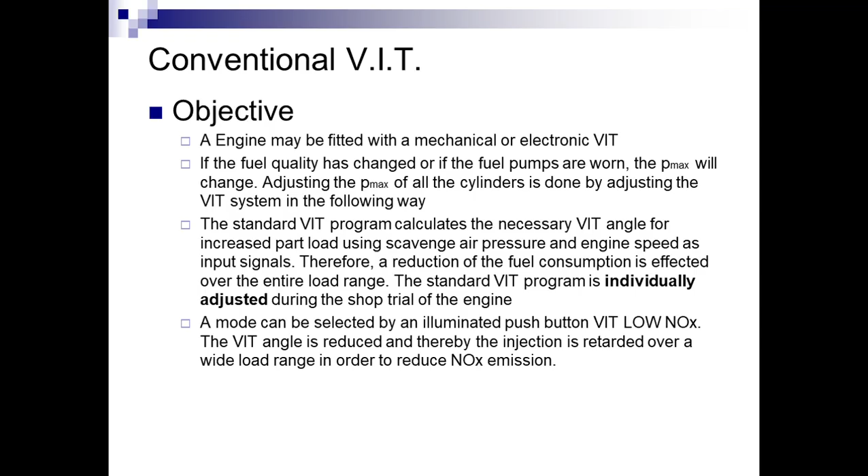Now, adjustment of mechanical VIT. The pilot valve has been pre-adjusted to 0.5 to 5.5 bar control air pressure, corresponding to 0.5 to 8 mm pressing in of the pin C. You can see here, this is the pin C, by which we are adjusting it.

To check a pilot valve already mounted on the engine, remove the inlet and outlet pipe connections at A and P, and connect a pressure gauge at A. After removing it, this is not the actual system, this is the pressure gauge we have adjusted. Connect a pipe with working air pressure of 7 bar at P on the pilot valve, and connect the pressure gauge at A.

Check that the pressure on the pressure gauge and the pressing in of pin C are in accordance with the curve. The adjustment of C given earlier has to be in sync with this graph. Correspondingly, however much you adjust, that is how much pressure will show on your pressure gauge.

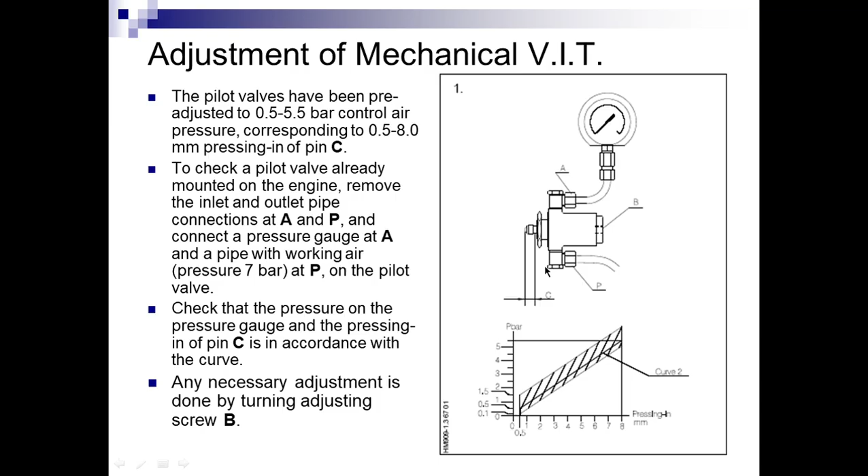Now, fine adjustment of the pmax pressure at the breakpoint for all cylinders is to be carried out by axial displacement of the bracket with the pilot valve.

Release the screw and nut which secure the bracket with the pilot valve to the larger bracket through the slotted holes. Increase the pmax pressure by moving the pilot valve towards the lever. Decrease the pmax pressure by moving the pilot valve away from the lever. This is how it is done.

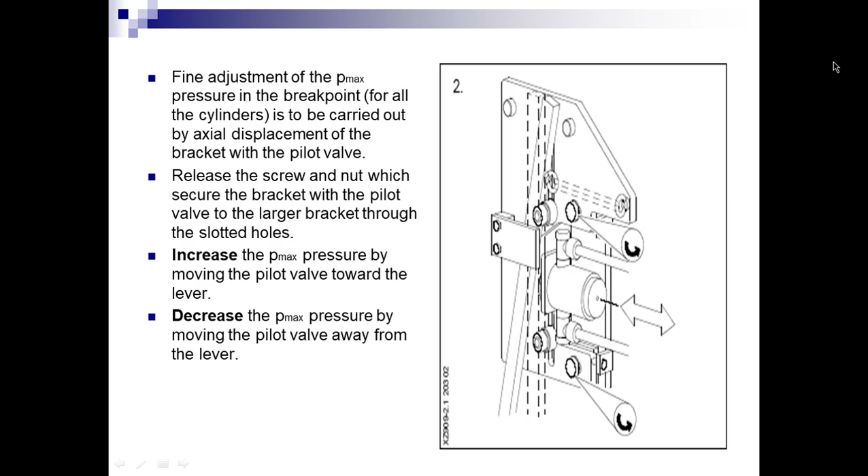So I hope it is clear for you. Now when we discussed what is known as your mechanical VIT.

Now when we speak about electronic VIT, the adjustment should be based on a set of indicator diagrams taken when the engine is running just above the breakpoint. On the panel in the engine room control room, change the P offset value in accordance with the required increase or decrease in the Pmax pressure.

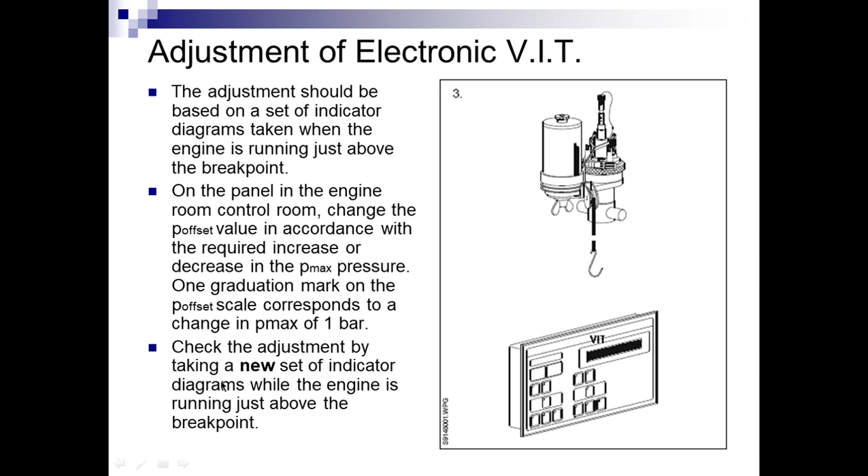One graduation mark on the P offset scale corresponds to a change in Pmax of 1 bar. Check the adjustment by taking a new set of indicator diagrams while the engine is running just above the breakpoint. Now we speak about FQS, having already seen mechanical VIT.

Now we have seen what is known as your electronic VIT. Now we are going to see this FQS. This is also a very important aspect, and it is fuel quality setting. So how are we going to adjust the fuel quality?

The objective is that the engine is equipped with a VIT plus FQS system, that is variable injection timing plus fuel quality setting, which permits an alteration of injection timing during operation.

Now the VIT plus FQS system produces a maximum firing pressure over a wide power range close to the value of the contracted maximum continuous rating, and thereby reduces the fuel consumption.

It is also possible to tune the VIT plus FQS system to follow NOx emission limits. Now the control of the VIT plus FQS is integrated in the engine remote control.

The manual FQS setting serves to take into account various fuel qualities. Fuels having a low ignition quality result in lower firing pressure for the same start of injection.

That is, for compensation, the FQS angle has to be increased. So if we have a fuel which is of lower ignition quality, resulting in lower firing pressure, we can adjust the FQS angle by increasing it, that is the fuel quality setting.

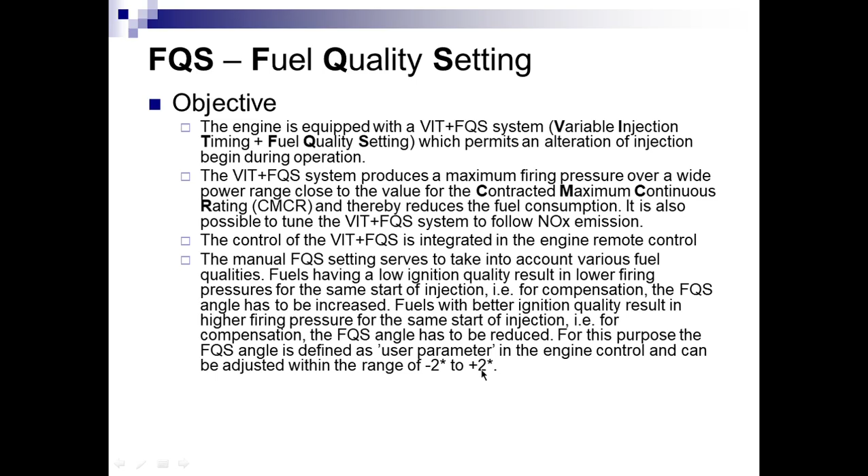Injection pump regulating linkage with electronic VIT and FQS. Now see, this is the linkage that we are looking at. Independent from the utilized governor type, the regulating linkage transmits the movement of the governor output lever, which is 1. So we have the governor and governor output lever, denoted as 1.

Via the intermediate regulating shaft, that is known as 4, to the eccentric shaft 15. So there is an eccentric shaft which is 15, denoted over here, and then for the spill valve of the injection pump.

So for the spill valve of the injection pump, the spill valve determines the end of injection and therefore the quantity of injected fuel. This spill valve determines your end of injection, and therefore the quantity of fuel that is being injected.

Now the adjustable rod 2. This is the adjustable rod which we can adjust to ensure a rigid connection between the actuator and the regulating linkage.

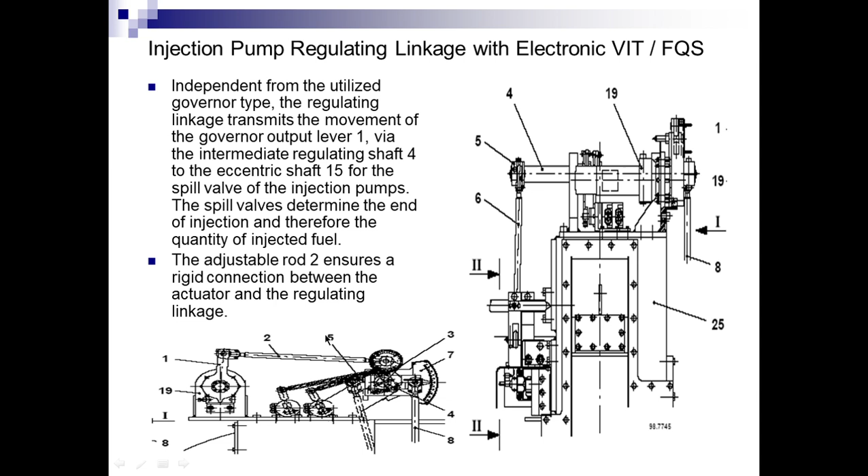In its normal operating mode, the VIT plus FQS system produces earlier injection in the partial power range and therefore raises the maximum firing pressure. With the manual adjustment FQS, the influence of fuel quality is compensated.

With the aid of the pneumatic cylinder in the positioning unit 17 and via the connecting strap 18 - you can see here it is 18, and this portion is 17 - the position of the suction valve and spill valve regulating lever 9, the spill valve regulating lever that is 9 which we spoke about in the previous slide, and 14, are simultaneously altered.

They are simultaneously altered, all at the same time, or maybe one after the other.

The moving out of the pneumatic cylinder gives higher VIT angle. So when this pneumatic cylinder is moving out, it gives a higher VIT angle, that is an earlier injection, and therefore a higher maximum firing pressure.

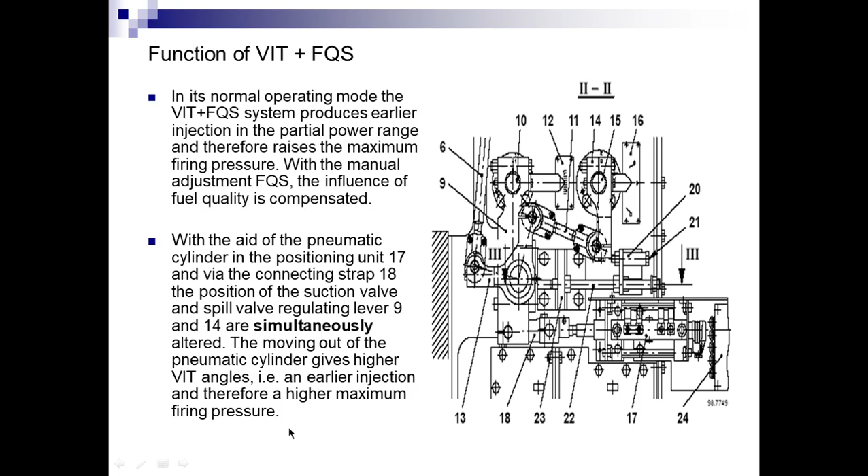So in case the fuel quality is lower, this cam is going to move out. This pneumatic cylinder is going to move out, so this will give higher maximum firing pressure because we will have earlier injection.

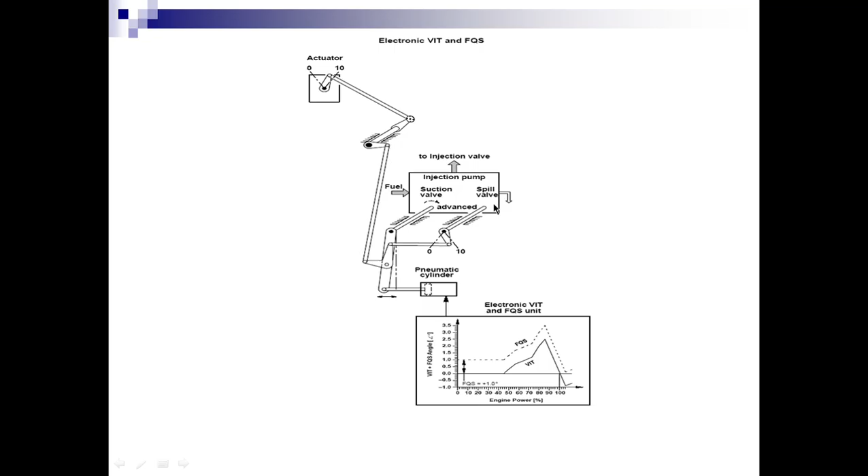This is the actuator we are speaking about, number 10, and through these different linkages it is connected to this pneumatic cylinder. Based on this, if it is moving towards the spill valve side, that is your advance, and if it is moving in the opposite direction, which is not shown here, then it will be in retard mode.

When we speak about super VIT, now we have already discussed all those things. Now we are going to discuss super VIT. The super VIT system is developed to fulfill the requirement of maintaining the MCR Pmax under part load conditions.

When we are running all the engines right now, except these new engines, we achieve the Pmax condition at MCR, but what is not achieved in all parameters of the engine is under partial load condition, in order to save fuel. We want to save fuel, because if the engine is running at low load, fuel consumption is much more as compared to the engine running at higher load.

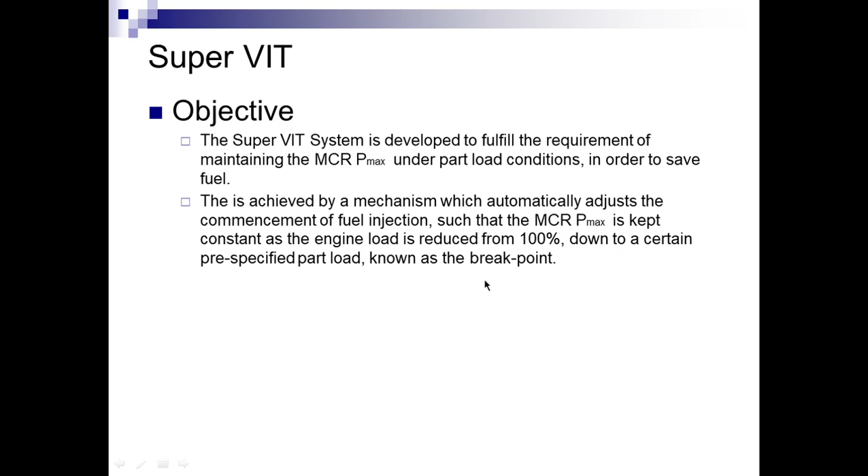This is achieved by a mechanism which automatically adjusts the commencement of fuel injection such that the MCR Pmax is kept constant as the engine load is reduced from 100% down to a certain pre-specified part load known as the breakpoint.

Now how is it working? In the super VIT configuration employed on the larger L/K/S-MC engine, the fuel pump plunger is not profiled, that is, it has no extra oblique cut, but instead the start of fuel injection timing is freely determined by altering the vertical position of the pump barrel, whereby in the system the breakpoint is fully adjustable.

So it is unlike your normal VIT system. The pump barrel is moved up and down relative to the plunger by means of a rack and pinion in combination with a double thread. The VIT rack setting itself is controlled by the regulating shaft position, according to the engine load.

When running at the breakpoint, the pump cylinder will be at a low position, giving early injection, and the specified design Pmax MCR and Pmax V for the engine in question, whereas in case of the conventional VIT system the breakpoint is fixed.

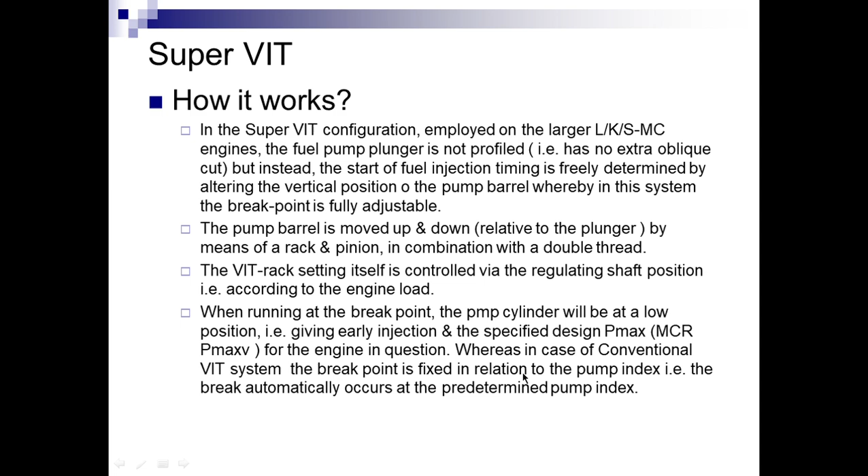So this is the difference in when we speak about the breakpoint, fixed in relation to the pump index, that is the break automatically occurs at the predetermined pump index. Now you see,

This is the pump barrel, that is the plunger, and we have double threaded injection timing regulating VIT. This mechanism is there, and position servo individual adjustment at each fuel pump. So at each fuel pump we have this individual adjustment.

Now this control air is going for operation. Now we have fuel quantity regulation index. Position sensor unit for collective adjustment is there. VIT rack position servos are controlled by means of an air signal from the common position sensor valve, which is placed on the emergency stand. So this is the change that has occurred of emergency stand.

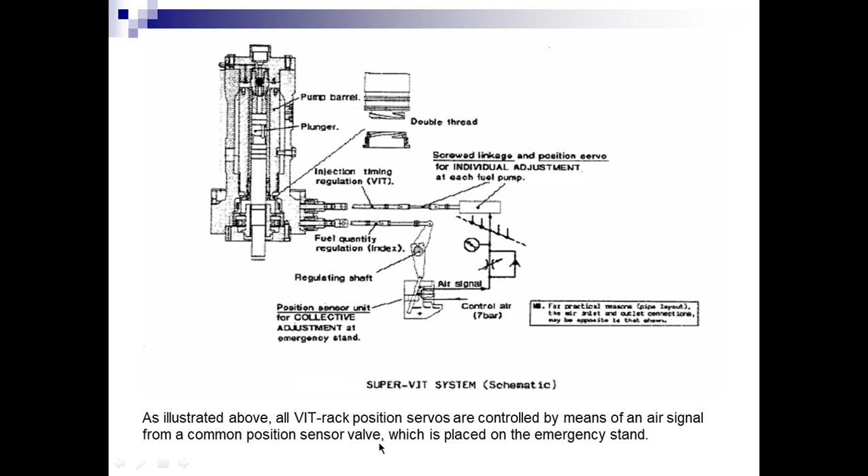Super VIT and the control mechanism, when we speak about, just have a look at the diagram.

Now this beam A is connected to the regulating shaft, fuel pump index control shaft, via the regulating arm B, jointed at C. So this is jointed at C, that is there.

Now the VIT system is out of operation at low load. This is ordered to avoid frequent changes of pump lead VIT index during maneuvers. At zero load, the beam A is fully lifted.

The position sensor D gives zero control pressure to the position servos at each fuel pump, such that a delayed injection timing is achieved compared to an engine without super VIT. So as compared to super, this is the D that we were speaking about. Okay, and this is the A.

As the engine load is increased, the late injection mode continues until the beam A has made contact with the sensor pickup E, and the resulting pressure reaches 0.5 bar. At approx 85% MCR, the maximum combustion pressure reaches the specified design pmax for the engine.

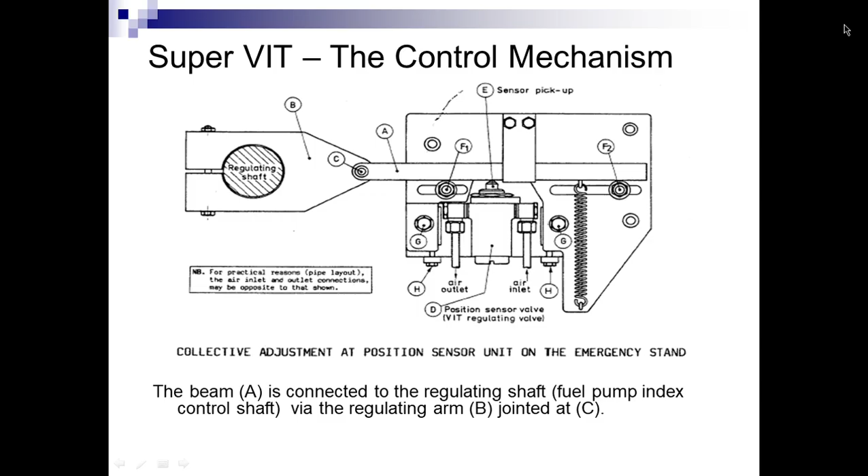Now see, going back, if the engine load is increased above 85% MCR, the beam A will rotate around support F1, thereby reducing the depression of the pickup sensor E. Correspondingly, the control pressure from the sensor causes the VIT rack position servos to retard the injection timing at a suitable rate, thereby keeping a constant maximum combustion pressure between approx 85% MCR and 100% MCR.

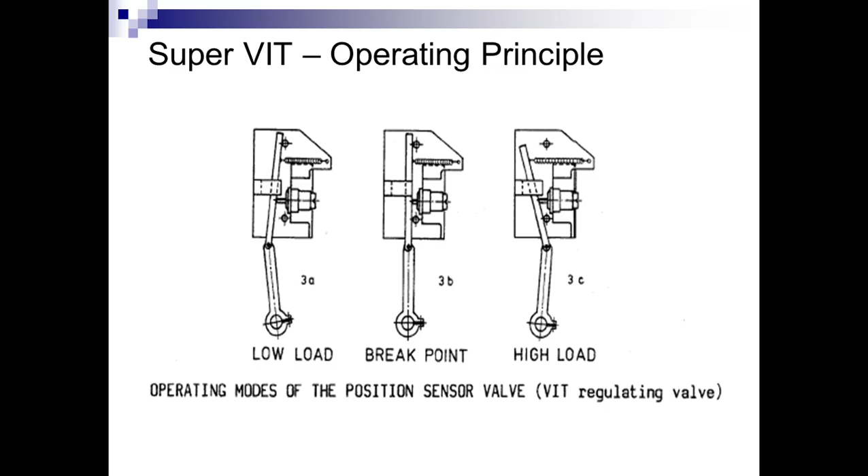Okay, super VIT operating principle. Operating mode of the position sensor valve, VIT regulating valve. This is the low load condition, this is the breakpoint, and this is the high load condition. So these are the three conditions that we are achieving, that is 3A, 3B and 3C.

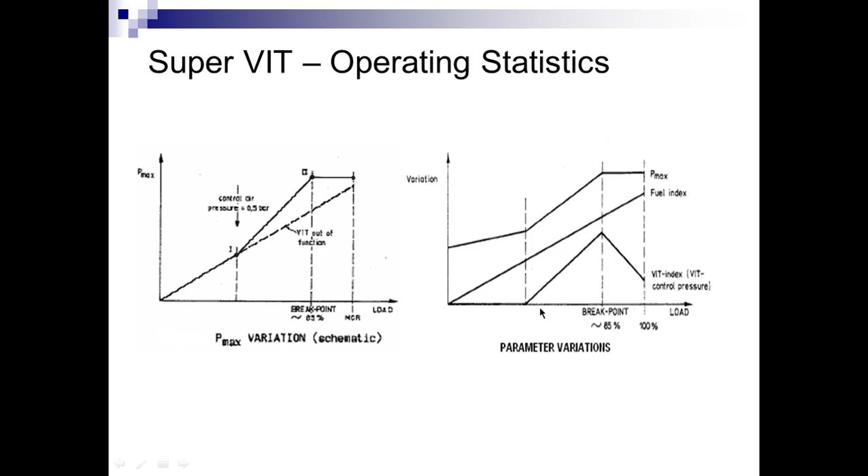Now see, super VIT operates. This is the pmax variation schematic. So this is the breakpoint that we were speaking about. Now this VIT out of function, pressure 0.5 bar. So this variation, when we speak about, now these are the parameters, that variation takes place. So it is VIT index, control pressure. You can see here the breakpoint, how it will have an effect. This is the fuel index and this is the pmax line. It is between the load and then the variation, this graph.

In this, we have clearly seen how the operation of your VIT system, this variable injection timing, works, in which we have seen this conventional VIT system, wherein we have also seen this mechanical and electronic VIT. This what we have seen is what is super VIT. This is a new concept that has come and how it is affecting all the parameters of your engine.

We have also seen this fuel quality settings and how VIT, when having a control of this FQS system, is affecting your injection and then the combustion pmax basically. So these things we have seen, and how you are getting different grade of the fuel, and how we are adjusting with VIT has to be this FQS setting has to be increased or decreased in what all cases. So these things we have seen clearly.